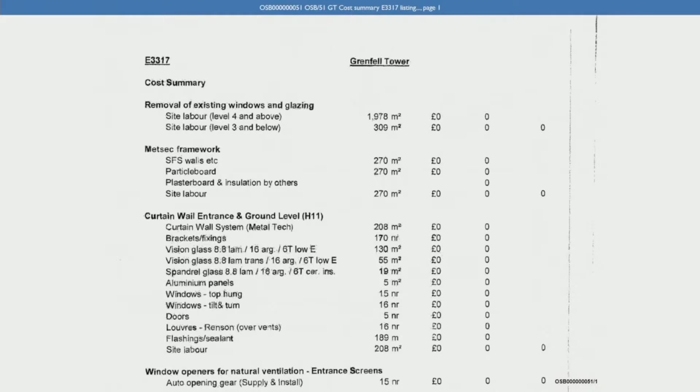So that's at OSB 7051. Here we can see it's for Grenfell Tower, and what this does is break down the materials to be installed in different parts of the tower, and it gives the metre squared of the materials that are required. Did you look at this document at the time when it was sent to you? I did, yeah.

And was it on the basis of this document that you priced the works? That's correct, yeah.

And was it expected that Osbourne Berry would insert its own figures into this document and then send it back to Harley? No, it was more for us to work out square meterage price for ourselves, just to compile an overall figure for the job, rather than filling out and sending it back that way. And is it right that you were the key person within Osbourne Berry responsible for looking at the price and the terms on which Osbourne Berry was engaged? Yeah.

And is it correct that you understood these to be the materials you would actually be installing on the project? Yes.

Now if we turn on to OSB 7046, this is an email from you to Mr. Maxwell, 5 days later on the 29th of September. And you say: price for job, 252,465. Any problems, give me a ring and let me know ASAP. Is price okay to carry on working? Thanks, Bez. So we can see that you provided a lump sum figure for your work on the project.

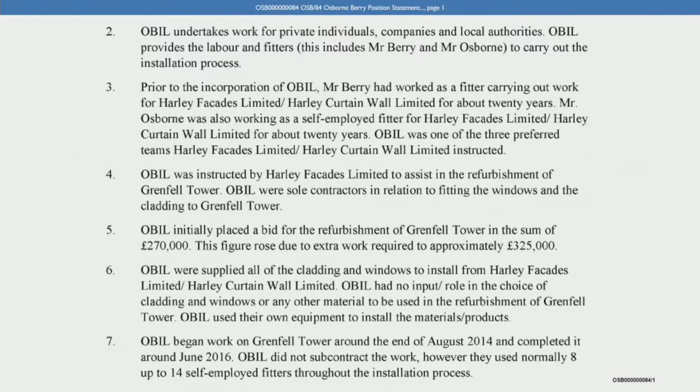There you say Osbourne Berry initially placed a bid for the refurbishment of Grenfell Tower in the sum of £270,000. This figure rose due to extra work required to approximately £325,000. Can you help us as to how that approximate figure was calculated when you put that in the position statement? The first figure or the later figure?

The later one, the 325,000. You say there it's approximately. Can you help us as to how that figure was arrived at? It's just an approximate figure. I can't remember unless I had all the invoices in front of me to know exactly what the whole figure was, but yeah, that was just a rough working out, a gauge, an approximate figure sort of thing. So is this right that you didn't actually go back and double check the invoices, you did that from memory? Just roughly from memory, yeah.

We've had a look at the invoices, and first question, would that have been net of VAT, those figures you're giving there, or would VAT be on top of that? Sorry, would VAT be included in that or not? Probably not included. Right, so those are net figures. Yeah.

We've had a look at the invoices submitted to Harley between November '14 and March '17 and taken away any work that's obviously not on the Grenfell project, and it seems to amount to a little bit higher, 367,000. Do you think that's perhaps more like the amount of work you did? If that's the figures on the invoices, then yes, it would be right, yeah.

Now if we can turn to OSB 7050. This is, we think, an email from you to Ben Bailey on the 28th of August 2015. You say, 'Hi Ben, this is the email I sent to Rob for Grenfell Tower. On top of this price is extras, which I discussed with your dad in a meeting at the office. I have a breakdown of this and can send it to you if you want. Thanks, Bez.' Do you see that there? Yeah. And what you've done is you've cut into this email and pasted below it the email we saw previously from the 29th of September 2014, so this email you're sending is almost a year later.

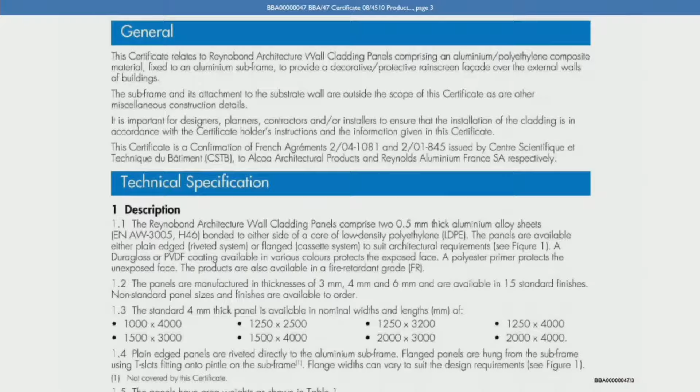If we turn on this certificate to page 3, at the top there's a general section. In the third paragraph it says: it is important for designers, planners, contractors and/or installers to ensure that the installation of the cladding is in accordance with the certificate holder's instructions and the information given in this certificate. Were you aware at any stage on the Grenfell project of being provided with instructions from the manufacturer? That would have been Alcoa or Arconic. No.

So again, does it follow that you didn't check any manufacturer's instructions before you installed the ACM cladding? That's correct, yeah.

In terms of that installation, how did you know how to install it? Were you simply following Harley drawings, or were you drawing on past experience of installing panels? Mainly Harley drawings, and this system was different to the ones we'd done before because it was a hook-on system. So there's only one way you could install the panel onto the building anyway, with the rails and the hook-on system, so yeah.

Had you ever worked with a hook-on or cassette system before in installing these types of panels? Not this type of panel, but a similar panel. It was an aluminium panel with a hook-on system at, I think it was Newham Hospital.

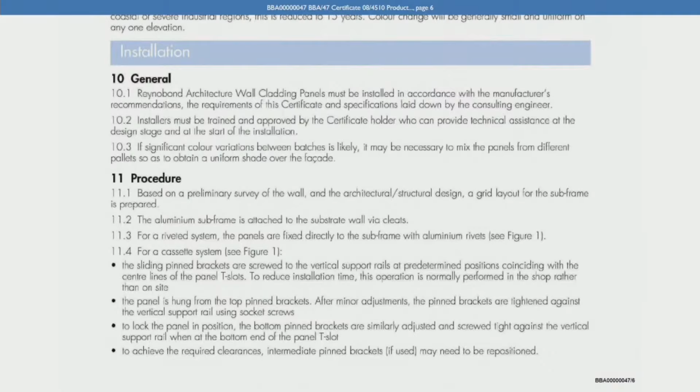London, yeah. Okay, and then if we go to page 6 of this certificate and look at section 10, it says in paragraph 10.2 there, installers must be trained and approved by the certificate holder who can provide technical assistance at the design stage and at the start of the installation. Do you see that there? Yeah. Did Osbourne Berry ever receive any training from the manufacturer by Alcoa or Arconic?

No. Do you know whether Osbourne Berry was approved as an installer by Alcoa or Arconic? Don't know.

Were you aware at the time you were installing the panels that the way they were being fixed on the Grenfell project differed from the standard Arconic detail for the cassette system? The system we've used before was a riveted system. And obviously Grenfell was a hook-on system, so that's the only difference we were aware of, yeah.

So you weren't aware that there might have been differences between how Arconic would, as a standard, recommend the cassettes to be installed and how you were installing them? For example, the types of bolts that they were hung onto? No. No.

What did you think at the time you were working on the project? What did you think was inside the core of the panels? It was a black material of some sort. We've used it before on different projects as well. It could be a plastic, it could have been plastic, I don't know, but you can definitely see the black material inside the core itself.

So you said it might have been a plastic. Did you actually know at the time you were installing it what the core was? No. And did you know it was a plastic?

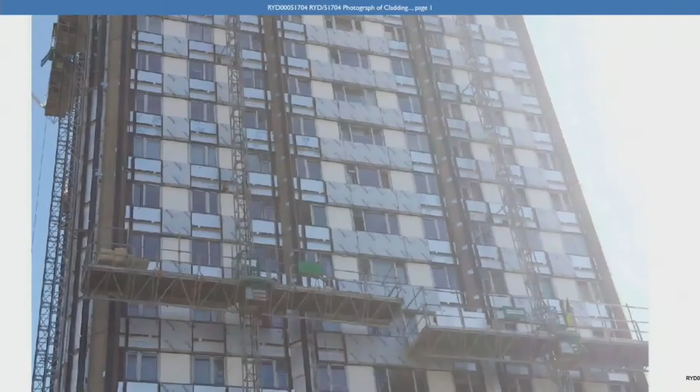Now, we looked at this photo yesterday with Mr. Osborne. If we could focus in on the bit above the mast climber on the left-hand side. I think Mr. Osborne confirmed that if you look three levels up from the mast climber, right on the far left, you can see some insulation. So either side of the branded Reynobond panels, you see some insulation which appears to have the Kingspan marking on it. Can you see that? I can see that, yeah.

And is it right that Kingspan was installed on the spandrels and some of the columns? As far as I'm aware, yeah. And can you help us as to which face of the building this is? If we pan out again now.

We showed this to Mr. Osborne yesterday, and he thought it might be the east face. Can you help us? I think that's the west elevation as far as I'm aware. And why do you think it's the west? Just purely because on the east elevation there was some big trees and other stuff in the way, and I don't think you'd be able to get an angle on a camera to take a clearer picture like you have on that one. We know it's either the east or west face because it's only got two inner columns. That's correct, yeah.

Can you remember when you were first asked to install, or when you first started installing the Kingspan K15 product as opposed to the Celotex product? Do you have a memory of the Kingspan suddenly being there as well? I wouldn't say it suddenly appeared there, but there was a difference in delivery.

Different company that supplied the material. One was a company called SIG, I think it was, that delivered the first lot, and then the second lot, can't remember the company's name, but it was a different coloured lorry with different stuff on the back of it, from Kingspan. So does that mean you have a clear memory of two separate deliveries of Kingspan to the site? Yeah, I can't remember the dates, but there were different deliveries, yeah.

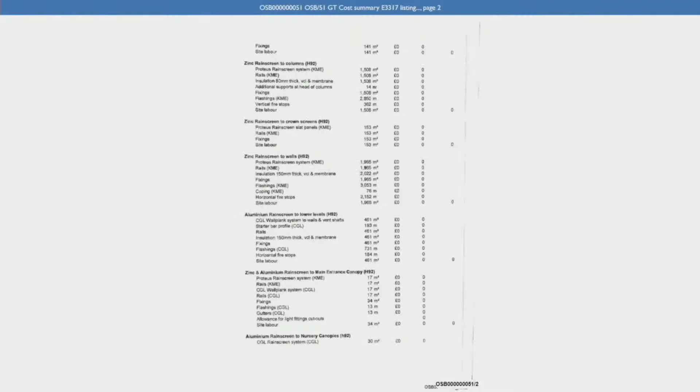Yes, if we look at the schedule of quantities that was provided, the bill of quantities again, this is OSB 51. And if we look at page 2 of this, we can see under zinc rain screen to columns at the top of that page, we can see that vertical fire stops are listed as the second to last item in that list. Can you see that there?

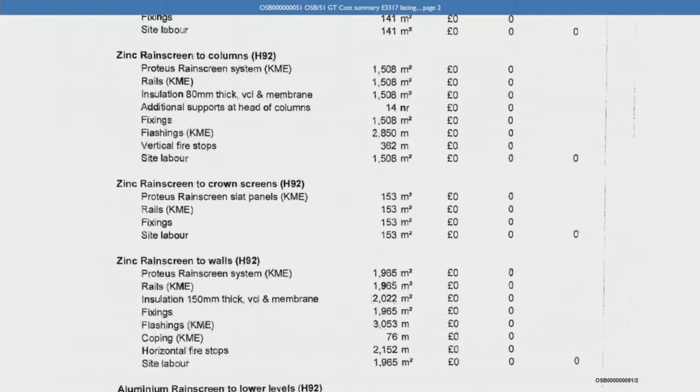362 metres there of that. And then a little further down the page, under zinc rain screen to walls, we've got horizontal fire stops, 2,152 metres. So we can see that a lot more horizontal fire stops were going to be required than vertical. That's right, isn't it? That's correct, yeah.

And was it your understanding, when you were pricing up the job and looking at this, that those two items, the vertical fire stops and the horizontal fire stops, were two different products? At pricing, no. Not until we actually got onto the site. We found out they were two different.

One was the intumescent strip on the front, which was on the horizontal, and the vertical ones wasn't. It was just a plain fire stop itself. Yeah, a full fill fire stop. That's correct, yeah.

So just to be clear, at the time you were looking at this bill of quantities early in your involvement, is it your evidence that you didn't understand that vertical cavity barriers were generally different from horizontal ones in terms of that distinction? One's got an intumescent strip and one's a full fill block. It all depends what was agreed with, obviously, the architects and the clients at the time.

Previous projects we've used different products, but not with an intumescent strip as such. We've used one at Hounslow. It was more of a foiled, very thin piece of material that was fixed the same sort of way, but a completely different design aspect from another company as such.

So, again, does it follow from your answers that you didn't have any experience of installing these kind of cavity barriers on a building prior to the Grenfell project? We've used them on other ones, yeah, but not with the intumescent strip as far as I remember.

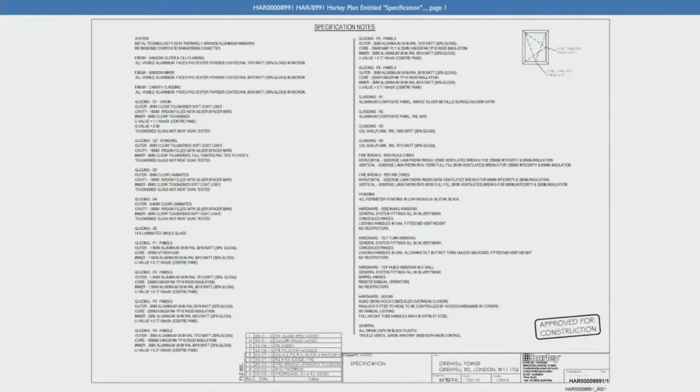Now, on these specification notes, on the right-hand side, around halfway down the page, it says fire breaks refurb zones. We can see the distinction between two different products, the horizontal and the vertical, with the horizontal being ventilated breaks and the vertical being full fill non-ventilated breaks. Do you see that there?

I do, yeah. So can you help us, when did you first understand on the Grenfell project that there were these two types of cavity barriers? When the first delivery turned up, which would have been the horizontal one with the black strip on it, we saw that. And then it wasn't until we're doing the verticals further down the line that the different product came in then for that.

If we can turn now to SIL 230, this is some of the Siderise marketing material for the two types of cavity barriers. Can you help us, did you ever see this kind of marketing material when you were installing the barriers? I don't remember, no.

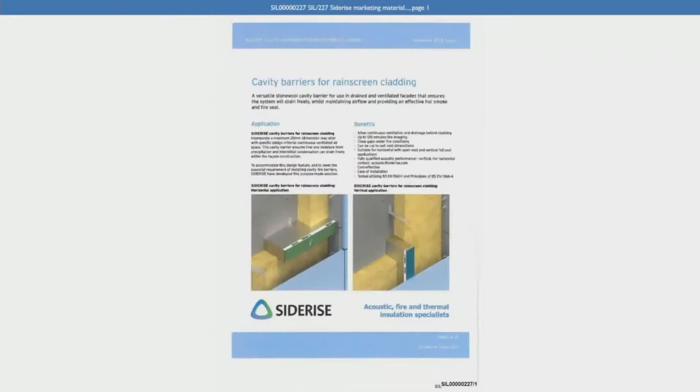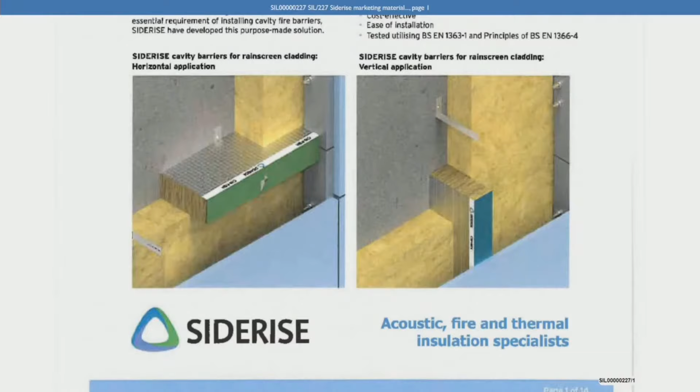And if we go to SIL 227, this is more Siderise marketing material, which also contains some installation guidance within it for those installing the barriers. We can see at the bottom of that page, you've got the horizontal application barriers and then the vertical ones. The horizontal ones there have got green tape on the outer face. Is it right that on the Grenfell project they had just a strip of green tape on the top of the barrier? From the pictures I've seen, yeah.

And what about the vertical cavity barriers? Do you remember them having any particular markings? Not particularly, no. So in practice, when you were on site, how were you distinguishing between a horizontal cavity barrier and a vertical cavity barrier? Because the horizontal ones had the black strip on the front edge of them. Right, I see.

And just to be clear, did you read any guide that looked like this at the time you worked on the project? Not that I'm aware of, no.

Can you help us as to what guidance would have been given to the fitters you had instructed to work on the project about the installation of the cavity barriers? How would the fitters know what to do with them? We done their first mock-up, and after that we took them up there, showed them the initial mock-up, and then took them on to other mast climbers and explained to them how we wanted it done, showed them how we wanted it fitted on the building, and then after that they were working either beside us on another machine or on our machine as well, so we were watching how they were fitting it and making sure we were happy with the quality of work and stuff like that.

And when you were training the fitters, did you draw a clear distinction between what a horizontal cavity barrier looked like and a vertical one? At the time, on site, there was only the horizontal ones there on site anyway, because the verticals would be done later on. And we did explain to them that when the vertical ones turned up, they were completely different to the horizontal ones.

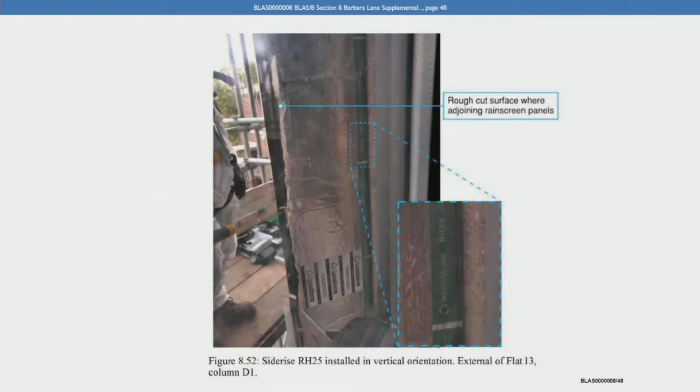I'm not going to take you to all the pictures in Dr. Lane's report, but I want to ask about this point: horizontal cavity barriers installed in the vertical position. If we look at a photograph in Dr. Lane's report, this is BLAS 8 at page 48, figure 8.52 from her first report in phase 1. What we can see is she's highlighted an RH, a horizontal cavity barrier, installed in the vertical position, and it's been installed with the intumescent strip facing into the building. Do you see that? Yeah.

Did you ever see any examples of that while you were on site? I didn't know. Had you seen that installed in that way, what would you have done? Replaced it, taken it off and replaced it with the correct one.

If we can look at another photograph, this is from the BRE report that they did for the Met Police. I didn't look at this photograph yesterday, but I want to today. It's MET 39807, page 52. This is a report the BRE did for the Met, dated I think February 2019, once the BRE had finished its site inspection work after the fire. Here we've got figure 34, and the caption says: open state cavity barrier being used as a closed state barrier, installed with intumescent strip facing concrete. Do you see that there? And if we look at the paragraph below this...

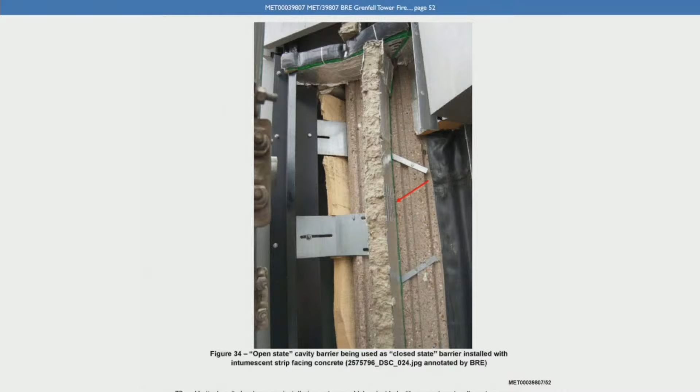The BRE say this: vertical cavity barriers were installed on columns which coincided with compartment walls and on corner columns. These appeared to BRE to have been intended as conventional closed-state cavity barriers, wherein the mineral wool construction of the cavity barrier ought to be compressed between the surfaces of the cavity. The vertical cavity barriers removed were Siderise Lamatherm RH25, i.e. the same barriers used at horizontal locations. As mentioned above, these barriers, designed as open-state barriers, but here being improperly used as closed-state barriers, comprise a foil face and intumescent strip sealing the leading edge. Do you see that there?

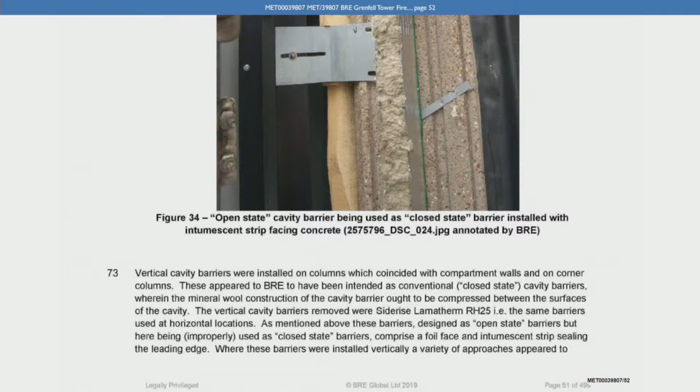I do, yeah. So Dr. Lane's investigation after the fire and the BRE's investigations have both indicated that they were finding vertical cavity barriers which were horizontal and not true full-fill vertical cavity barriers. Can you help us as to how that situation might have come about?

I can't explain it, to be fair, because they were two different products installed in two different areas on the site itself.

Is it possible that some of the fitters, some of the installers working for Osbourne Berry were left to their own devices when fitting these barriers and installed horizontal in the vertical position without any checks? Most of the time we were always on site looking at what people are doing on various mast climbers around the building, so I can't see how it would have happened as such.

Was there any specific instruction or training given to the installers when the vertical cavity barriers arrived? You say that was later, you didn't have those to start with. Do you recall actually talking to them and saying, right, these are different? They were completely different pallets stored in a different location on site. And you could see the complete difference - one had the black strip on the front, the other one didn't at all. So we did say these are the vertical ones, these are horizontal ones.

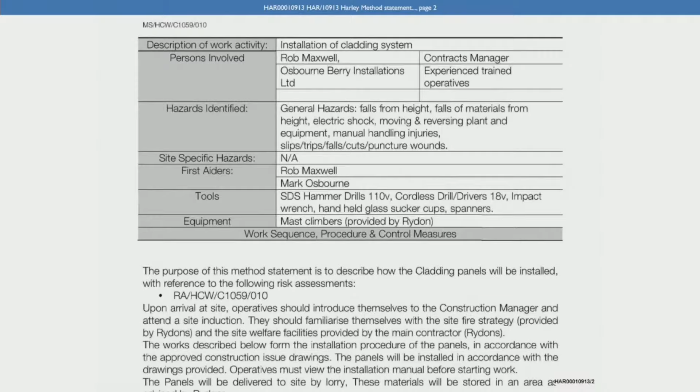Now, did you always engage experienced and trained operatives on the Grenfell project? Yes.

Were you ever short of fitters or fitters' mates such that you did end up having people on site that perhaps it wasn't ideal to have there, but you just had to because circumstances forced that? No.

If we can now turn to TMO 100009962. This is a site inspection report that's been put together by John Rowan and Partners. Can you see that? Yep. And we can see that the person that's actually written this is John White, we can see his name is under inspector there.

Did you know John White during the time you worked on the project? I don't recall his name as such, no. Were you ever aware of being introduced to a clerk of works or someone who might... I got introduced to a clerk of works, but I can't remember his name. Did you ever have an understanding of what that person's role was on the project? Obviously just to maybe check the quality of work and what was being done on the job itself.

Did that person check the quality of your work, as far as you understood it? I don't recall. I can't remember this John White's name being brought up before in conversation on site, but maybe he did, I don't know. But you don't have a recollection of him checking your work? People have been up and checked our work, it was either the council, the building inspector or whatever. I do recall times people going up there and inspecting our work, but again, name-wise, I'm not sure.

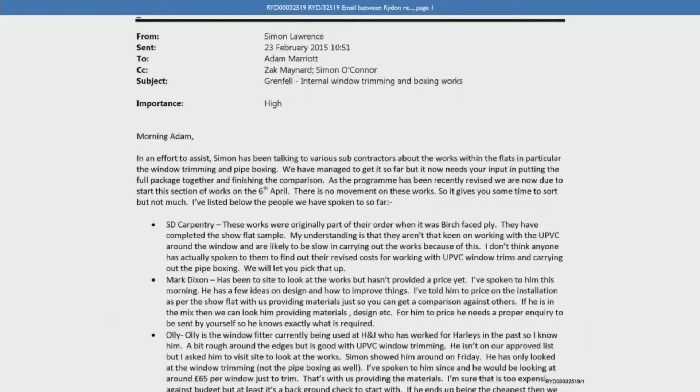So do you see that there? I do. Yep. So it would appear that you've been to site to look at the works but haven't provided a price yet. Can you help us? Do you think this would have been for the interior window surrounds in February 2015?

Yeah, again, like you say, I've never seen this email before, and I'm not quite sure of the context. I certainly don't remember going back as far as this, but then even when I was trying to pin the date down of April, that was a little bit guesswork. There are no diaries to tell us where it was, and it may well have been that in one of my visits, someone has said, can you just have a quick look at this.

Obviously, yeah, my background being that it is with Rydon, and I have worked in different parts of refurb, is that I can normally give some sort of guidance or shed some light on perhaps an idea that might make life easier.

And where he's referring there, I've spoken to him this morning, he's got a few ideas on design and how to improve things. Told him to price on the installation as per the show flat. Do you think that was the show flat 145, where they'd done a mock-up? I'm pretty sure that was the only show flat. There was only one show flat. I'm fairly confident there was one show flat. Yeah, that's helpful.

Now we'll come in a bit more detail to what you saw at the show flat in a moment. If we can now turn up RYD 3035207.

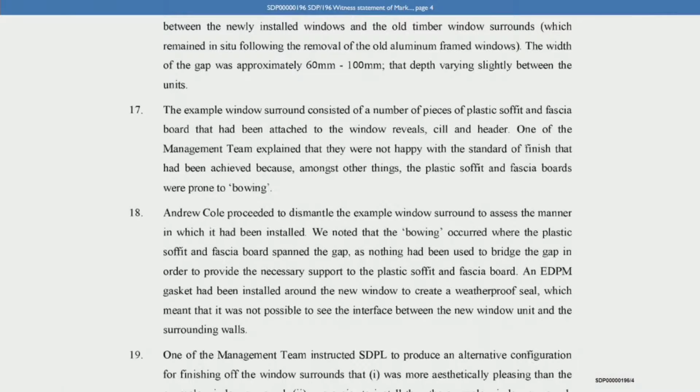We noted that the bowing occurred where the plastic soffit and fascia boards spanned the gap, as nothing had been used to bridge the gap in order to provide the necessary support to the plastic soffit and fascia board. An EPDM gasket had been installed around the new window to create a weatherproof seal, which meant it was not possible to see the interface between the new window unit and the surrounding walls.

So we've got a good description there, and the bowing that you're describing there is what you were just talking about just now, is it? Yes.

And is it right then that where there was the gap around the edges of the windows, once you've gone beyond the old window frame, that on the mock-up that you saw at that point, there was nothing at all underneath the UPVC? Yeah, well, that's my recollection of it, but reading again an email further on, Simon Lawrence mentions that actually when they did the mock-up, they'd used some Celotex to support and to close that gap. Now, that may have been on one of the other sample windows, and the one that we exposed at that time didn't have it in, so, and hence why the bowing was there.

I see, yeah. Now, if we could just look at Mr. Cole's witness statement at this point, if we go to that, this is SDP 220 at page 3. And I want to look at paragraph 14 on that page and what he says.

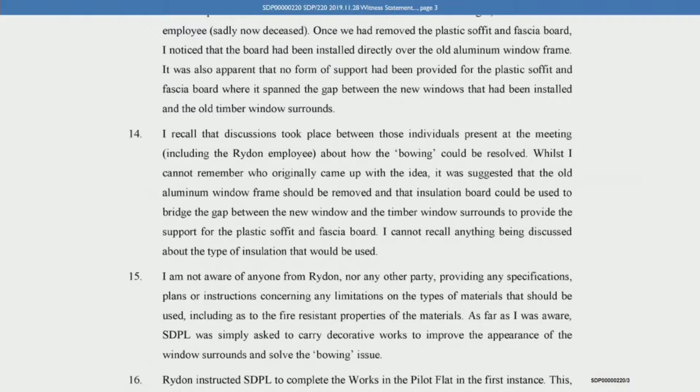He says, I recall that discussions took place between those individuals present at the meeting, including the Rydon employee, about how the bowing could be resolved. Whilst I cannot remember who originally came up with the idea, it was suggested that the old aluminium window frame should be removed and that insulation board could be used to bridge the gap between the new window and the timber window surrounds to provide the support for the plastic soffit and fascia board. I cannot recall anything being discussed about the type of insulation that would be used.

So do you see that there? Yes. Do you agree with Mr. Cole that it was at that meeting that somebody suggested that insulation board could be used to bridge the gap and try and overcome the bowing issue? Yeah, I'd imagine there was half a dozen different scenarios that were discussed, but that was the one that was actually implemented. Do you think that it may have been you who made that suggestion?

It could have been, but I can't remember. Okay. In his oral evidence to the inquiry, Mr. Lawrence suggested that this was a decision taken jointly by Rydon and SD Plastering. Would you agree with that? It would certainly been discussed. No one person takes a decision on their own. It would have been between everybody. But again, what we would have done was we would have perhaps put an idea forward to be signed off by everybody else.

He agreed with the suggestion that the solution for remedying this issue was a bit of trial and error. He said that on day 25, page 40, line 23, and day 25, page 58, line 4. Would you agree that remedying that issue did involve a bit of trial and error?

Possibly, but some of that trial and error have already occurred by doing the actual first sample of it. So whoever carried out the first one, they may have carried out 2 or 3 different scenarios as well. Yeah. So that trial and error refers to might not just be to us, it may be to whoever carried out the original sample. Yeah.

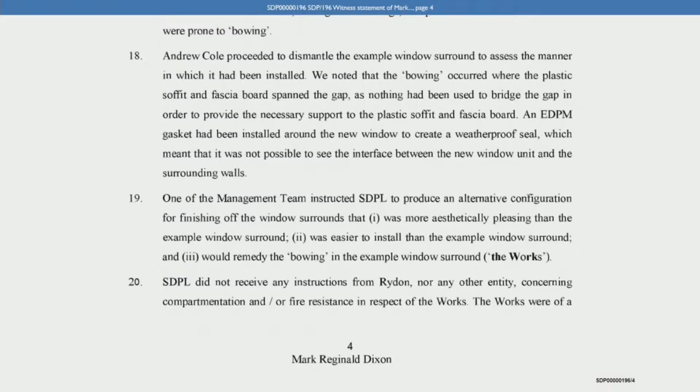Yes. And when you're referring there to the management team, do you mean Rydon asked SDP to produce the alternative configuration? I do, yes. And can you help us as to what exactly Rydon asked you to do in practice? That was the criteria they put in front of me. And they actually gave those three criteria, did they? But it would be verbally, yeah.

It would have been learned from what we'd already seen in the show flat that it was difficult to install. It was not a quick process. It needed to affect the residents as little as possible, but leave them with something that was pleasing to the eye and wasn't going to give them a load of stress, staring at every day after that point.

And when you say it would have been done verbally, can you recall who you had that conversation with? No.

Did you get the impression at this time that Rydon was leaving it to SDP to come up with a design solution for the window surrounds? No, I think it was certainly a collaboration between the two of us. I think with all of these things is that any management team, such as Rydon or every main contractor, will call on the skills and input from other people around them to try and get together as many ideas as possible.

Did you get any specific guidance from Rydon about how they wanted the design to end up? No more than what's written on the screen. Were you ever provided with any information by Rydon when doing this alternative configuration? For example, were you ever given any specification for materials that should be used with it? No.

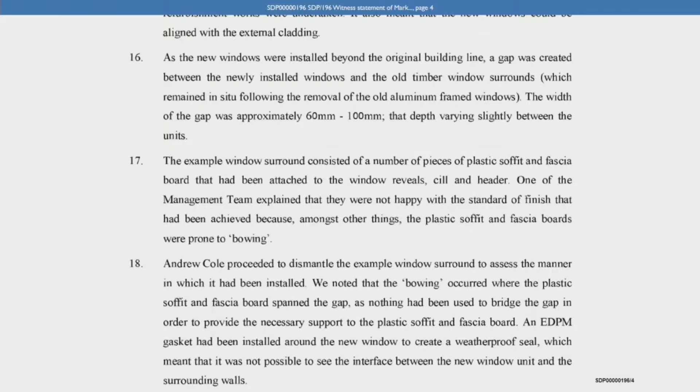Now, looking back at paragraph 16 of your statement at this point, on page 4, you say this. You say, as the new windows were installed beyond the original building line, a gap was created between the newly installed windows and the old timber window surrounds, which remained in situ following the removal of the old aluminium framed windows. The width of the gap was approximately 60 millimetres to 100 millimetres, that depth varying slightly between the units. Do you see that there?

Yes. Did the fact that the windows were installed significantly beyond the building line, leaving that gap, ever give you any cause for concern about the design of the window surrounds? No, it hadn't. I hadn't looked at it and gone, well, that's going to be a problem, apart from bridging it, because the criteria that we'd been given was literally to make this an aesthetic finish, bridge that gap, make sure it stays in place.

Yeah. Did you ever think about whether that gap might create a vulnerability for fire around the windows? Not at the time.

Had you ever worked on any similar refurbishment project for windows, where windows have been installed beyond the building line and you've got to try and bridge a gap? No. So this was a unique problem, was it, that you came up against? It was unique for us, but it wasn't necessarily unique for Rydon.

Had you ever previously been involved in any window refurbishment work in a high-rise residential building? I can't recollect one. I think the only one that I'd done with Rydon was for Laker Court, which was one of the early ones where I was an assistant site manager, or actually I was a senior site manager at that point. But I think we refurbed those windows, though. I don't believe, they might have been replaced, yeah, but they stayed on the same building line, so it wouldn't have become apparent. And that building, Laker Court, was that a high-rise building? I want to say 11 stories.